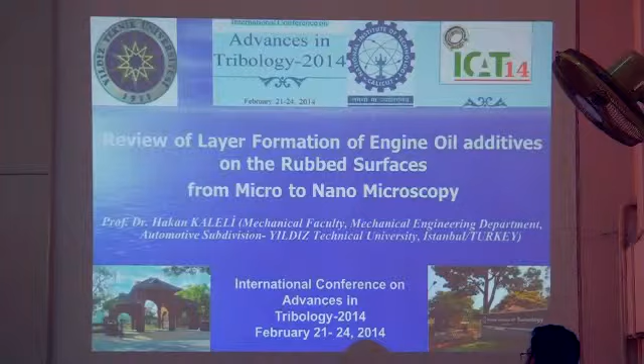Thank you. I will present about additive layers formed on the surface between sliding pairs, and I have been working on that for many years. So the title is Review of Layer Formation of Engine Oil Additives on the Rubbed Surfaces, from Micro to Nano Microscopy. It's a huge story that I will talk about.

But before I go on, I will introduce a little bit about my university. This is the main campus. We have two campuses, and I am in the main campus. We are happy because as a technical university, we are in a green yard. This is the only university that is green between trees, but it's on a hill at the top of Istanbul. Istanbul is situated on 7 hills, so this is one of them. We are lucky my university is on the hill. And this is the entrance.

It was founded in 1911, and there are 10 faculties, 2 institutes, and more than 23,000 students.

At the end of this is the Bosphorus Bridge, very famous. As you know, the Bosphorus Bridge separates the European side and the Asian side. Istanbul is divided into these 2 sides. Every day I cross this Bosphorus Bridge, and when I go to the top, on the hill, here is my office where we do lecturing.

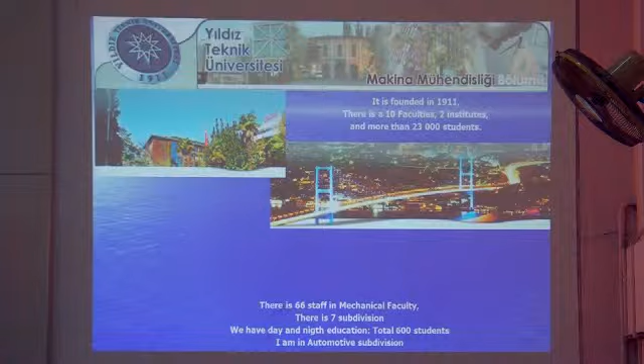I am in the Mechanical Engineering Faculty, in the mechanical engineering department. There are 66 staff in our faculty, with 7 subdivisions like automotive, heat transfer, manufacturing, etc. We have day and night education, with a total of 600 students. I am in the automotive subdivision. This is the automotive subdivision, and mostly we have engines and engine test rigs.

First of all, I would like to thank very much the coordinators for inviting me to this conference. It's an honor for me to be here as a keynote speaker. Tribology is the science and engineering of interacting surfaces in relative motion. My application is mostly on lubrication, which is part of tribology, and by lubrication I arrive at wear by friction. It's a huge story because I started this story in 1999, 15 years ago.

I worked on some test rigs with oils, but engine oils, and I obtained on the surface protective layers of additives. Yesterday, or before yesterday, we talked about prediction, and this was not prediction. I didn't predict to find protective layers on the surface, but after the test, when I found it, then I did more prediction.

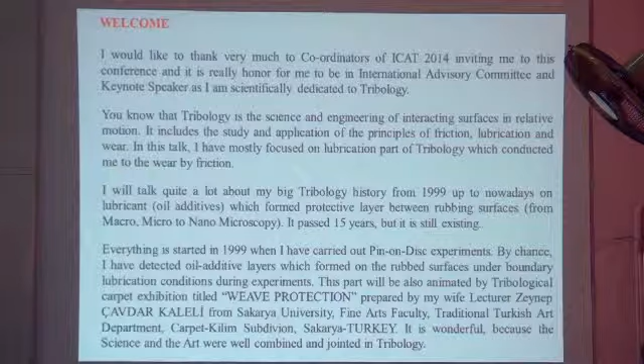This was carried out first of all on pin-on-disc experiments, which I will show you shortly. I found the formal tests on the surface, the formal testing conditions, and this can apply to every test rig.

So by chance, as I found this, you will see an exhibition - a carpet exhibition. My wife is in the art faculty at Sakarya University in Turkey, another university a bit far from Istanbul, about 1 hour and 30 minutes away. So we joined science and art - she weaved my tribology pictures, photos, onto carpets, which you can see in the exhibition.

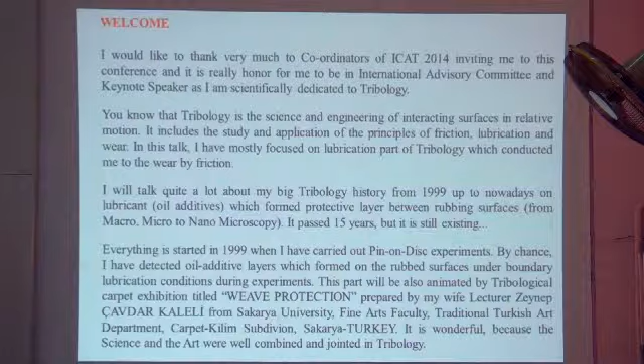This is a poster. I'm sorry because she couldn't come - my mother-in-law was sick and is in hospital, so she's very sorry not to be able to be here. Well, let's go to the work now.

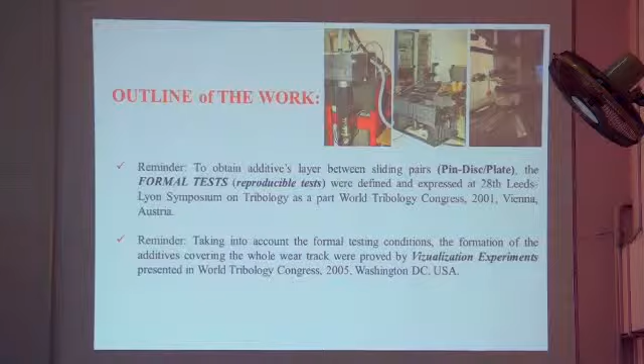Here you will see pin-on-disc, pin-on-plate, and another pin-on-plate machine. First of all, I did many tests on the pin-on-disc and pin-on-plate machines, and I found the formal testing conditions. I will talk about those in detail later, but just to explain to you the outline of the work.

Taking into account these conditions, we wanted to see, to film, to visualize the surface formation - how we obtained it. We wanted to see it, and we did it, and these results were presented at several congresses.

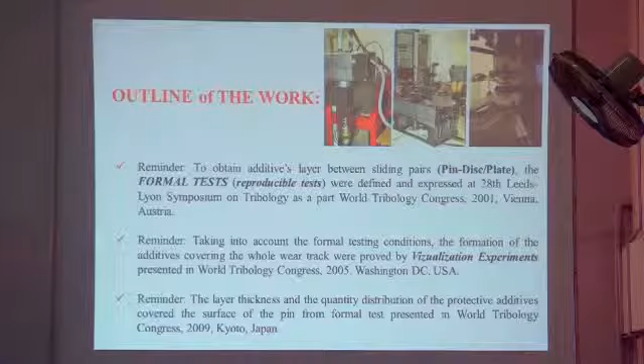As we have seen the surface, we wanted to measure the thickness, the layer thickness of additives. On pin-on-disc and pin-on-plate test rigs, we have specimens, but those specimens are mostly steel, like steel 52100 or 51115. These are regular standard materials used everywhere in the world.

But as we found the protective layer on the surface, and as I'm in the automotive division, I was very interested to see those layers, how they formed on the cylinder liner in internal combustion engines. So we did more experiments, and we detected those layers.

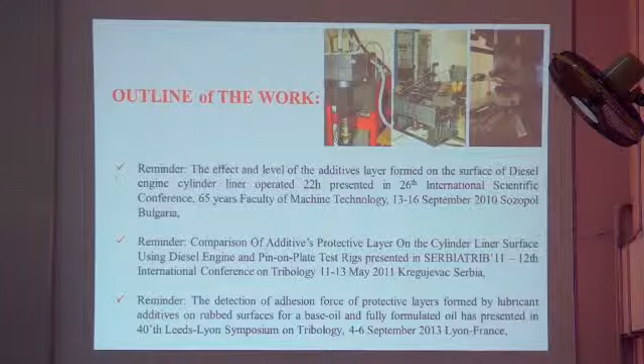We also compared the cylinder liner with plates from the test rig at another conference. Then we started to go from micro to nano, because at that time we were investigating using optical microscopy and electron microscopy. Then we went further and arrived at measuring and finding those additives using nano-tribology, nano-measurement with AFM.

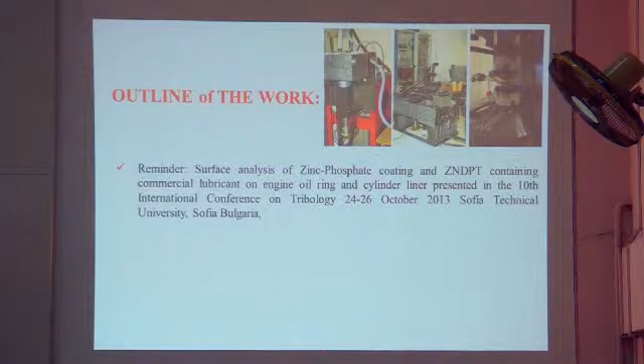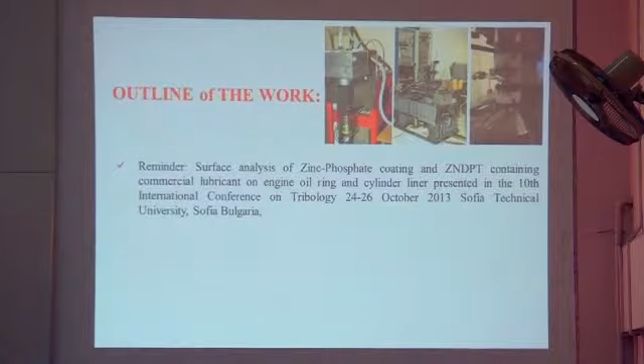When we were doing some engine tests, we detected very interesting results, which I presented yesterday. We tested different piston rings on the cylinder liner on a test rig, and it was very interesting because oil contains some additives, mostly ZDDP, calcium sulfonate, etc., like anti-wear agents, antioxidants, etc.

On the oil ring, not the compression ring, not the top ring, but the second ring, on the surface we detected zinc and phosphate. So they cover, they coat the second ring, the oil ring, with zinc phosphate. This is a very interesting subject, and we are working on it. I have a PhD student, and this work will be carried on more.

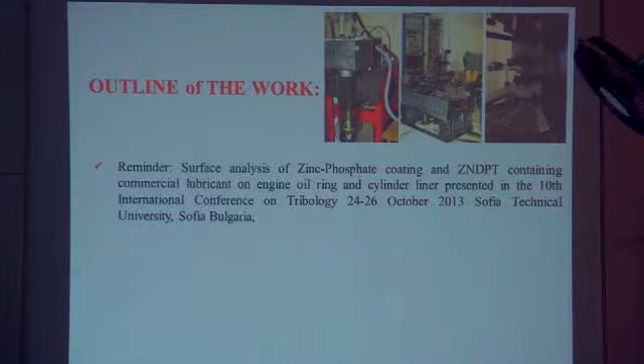As there is zinc and phosphate in the oil, the zinc and phosphate also get removed from the surface, and it contaminates the oil. This can be very dangerous because there is a composition of oil in the fully formulated lubricant - we have everything. If you add more additives to the oil, it can be dangerous. It can be positive, but mostly there is an antagonistic effect, not a synergetic effect, which degrades the lubricant. So we caught this, and we talk with some piston ring companies, and we are discussing more on that.

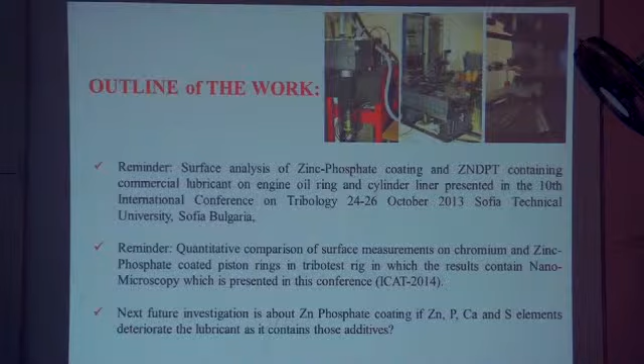This was presented yesterday, but I put some more slides to show you here. Well, the next future is to really compare zinc phosphate versus without zinc phosphate, doing more tests on pin-on, on reciprocating pin-on-plate test rig, and also in the engine.

So we finished some experiments on pin-on-plate, and we are now carrying out, setting up the engine test. So we will see the surface of the liner and also piston rings, but using the right piston rings also.

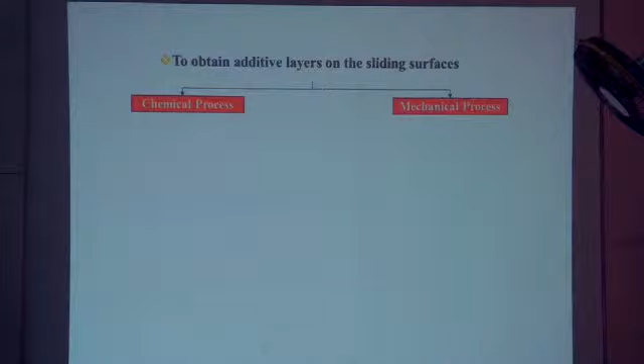Well, to obtain additive layers on the sliding surface, what do we need? This is general information - just to remind you, there are two processes, one chemical and the other mechanical. As we are mechanical engineers, I am mostly interested in the mechanical part, so the rest - sorry to the chemists - but they do more tests on EDS, reactions, etc. In the mechanical part, you can see.

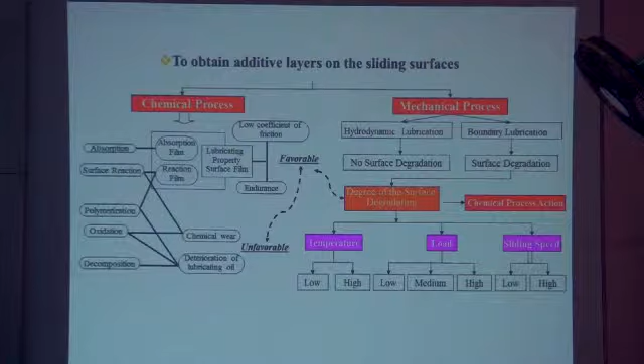So what I would like to explain here is, in the type of lubrication, if it is hydrodynamic, meaning oil separates the two surfaces, on the surface we don't obtain the protective layer we wanted. What we want is that all the additives form on the surface, covering it, like painting a wall with a brush.

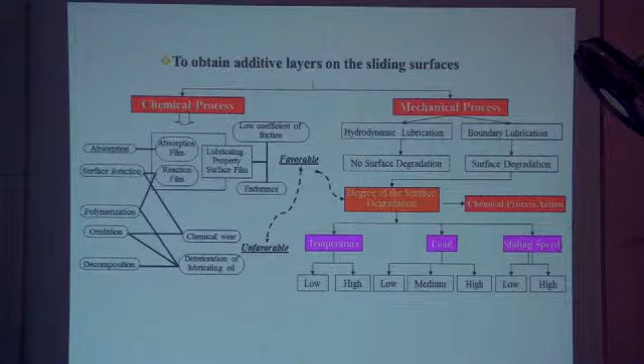Because in hydrodynamic lubrication, if the two bodies don't touch, there is no surface degradation. The surface must be degraded, but the degree of surface degradation is very high if it is dry friction - the surface is much more degraded, and additives do not form on the surface. This degradation is important, but it must be slightly degraded to make the surface attractive, a bit of flatness, suitable, where this favors chemical reactions.

So all the chemical reactions occur, and you have a layer on the surface. Of course, temperature, load, and sliding speed, which are mechanical conditions, affect the formation of those layers.

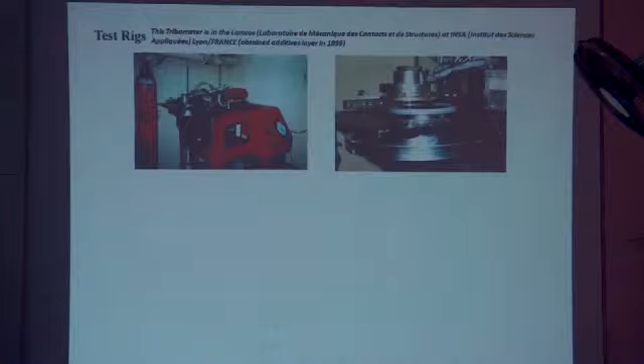Well, many years ago, 15 years ago, I was invited to France, to Lyon, and there is a big tribology lab there. I wanted to do tests, as I did in my PhD thesis, lubricant tests on a pin-on-disc machine. And very interesting, you know, this configuration.

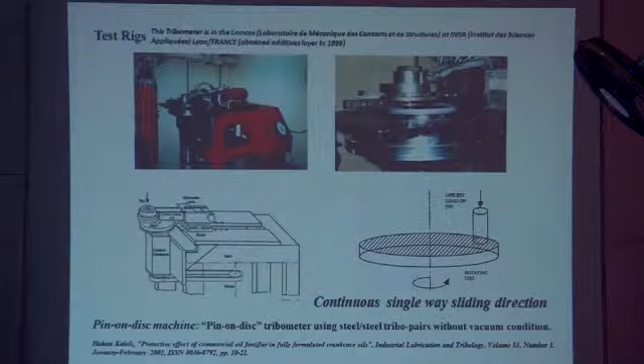I would like to take your attention, because it's very important. If you do the same test on pin-on-plate machine, you don't get additive layers. But we did some more tests with lubricant, with additives - that time, oil fortifier was very famous. Just to see the friction behavior and surface analysis. On pin-on-disk machine, when the disk turns around, it's always continuous, it doesn't stop. But in engine, it stops at top dead center and bottom dead center for a short time, and this affects the layers on the surface.

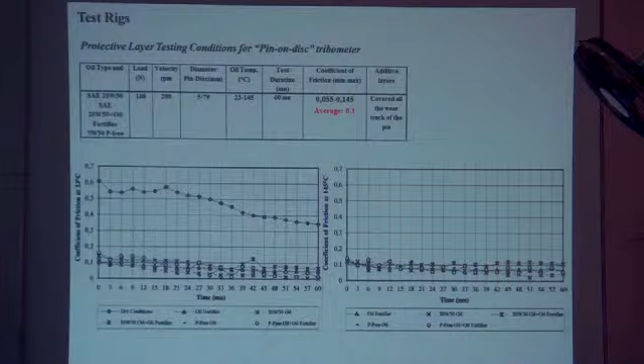That's very interesting. That time, the boundary lubrication as a friction coefficient was 0.1 as an average. So we did friction tests with different kinds of oil. What we obtained here - this is the pin surface, this is disk surface - there is no oil here, because it's a dry test, and first I wanted to see what happens on the dry test. I was curious about it. It's all worn out, scuffed. You see the surface is not very interesting.

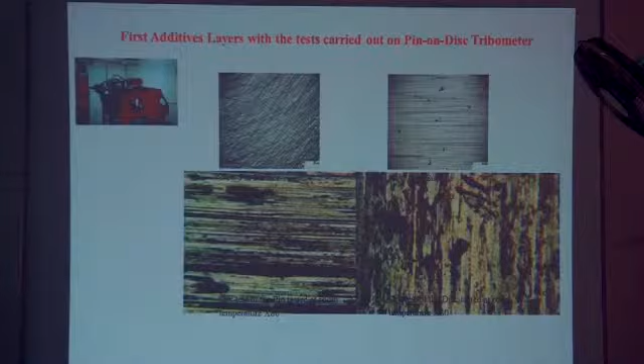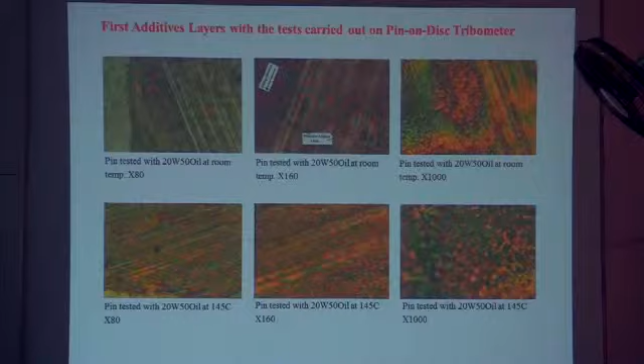So we did tests with oils, engine oil, and additives. I didn't predict this, but what we found really on the surface - the pin surface mostly - it was covered by very colorful things. When we investigated those colorful additives under the light microscope, optical microscope, they are colorful. So like Einstein, I said, oh yeah, we found this one. It was very interesting - you see the protective additive layers on the surface. I will show you many examples of this.

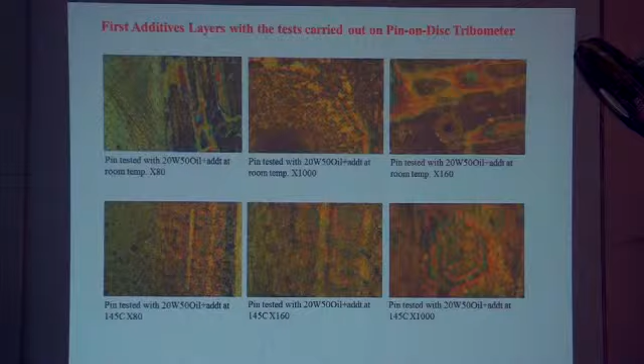That time, scanning electron microscopy was using only Polaroid photography. You cannot measure it electronically like nowadays. Also optical microscopy, that time it was very difficult - there was no digital camera, we first used a black and white camera, then we bought a very special color camera and got these pictures. So we developed these pictures, and I still keep the negative slides.

You see here that the pin surface - there is no rubbing here, but the rub surface here and the worn surface here are slightly degraded. If you investigate that surface, you will see that additives are coming out, shown by SEM and X-ray analysis. These are examples. I published this in the Industrial Lubrication and Tribology journal at that time.

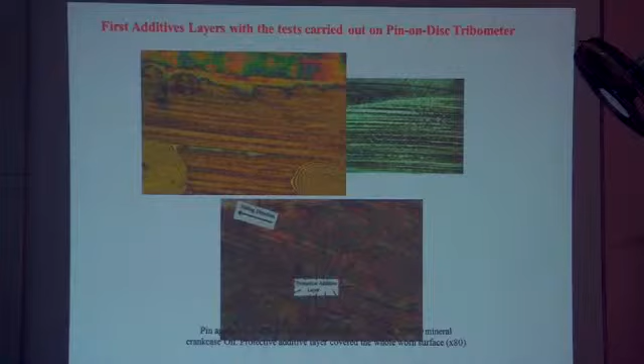What I would like to inform you here - this is the disk surface, because the pin material is different than the disk material. The pin material is a steel. The disk material is also steel, but has much more chromium on the surface, in the composition. So that time and even other times, the layers mostly formed only on the surface of the pin, but not on the plate.

Maybe I'll show you here - like here, you see this is the disk surface, and in a very small part, I could investigate where it forms layers like islands on the surface. There is some, but not too much.

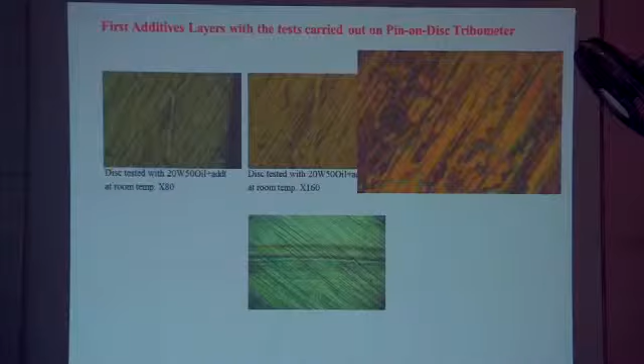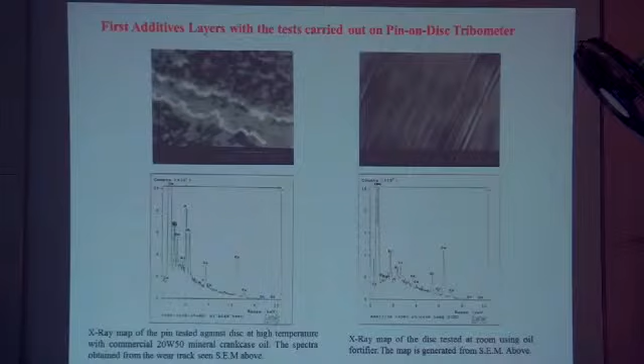Then we did some SEM photos. When I investigated on SEM, I found those additives formed on the surface, mostly because the oil contains calcium, phosphorus, sulfur and zinc. And when you go deeply to a higher magnification on SEM, it's like you are flying between clouds in the air.

You see, it's like clouds, very interesting. In the part of the disk surface, those clouds are much less visible - that part is not well viewed. You see the liner finishing parts, and it's like clouds here. These are additives.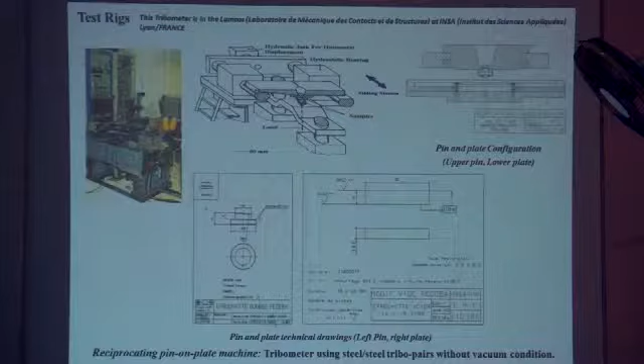In the next step, we wanted to do those tests on a pin-on-plate machine. France has got a very nice pin-on-plate machine, so you can do a lot of tests. We did tests on pin-on-disk machine, and pin-on-plate machine - sorry - this is the pin and plate surface. As the movement was continuous on the pin-on-disk, we couldn't be as successful. We did the same conditions on pin-on-plate, even with pin and plate. We obtained some additive layers, but it was like islands.

So I always say, you paint the wall, and the wall is not painted - just if your brush has less paint, you don't paint very well. But if you have more paint, thicker color, then your wall is all painted. In the case of pin-on-plate, it is not well painted - the additive layers formed like islands.

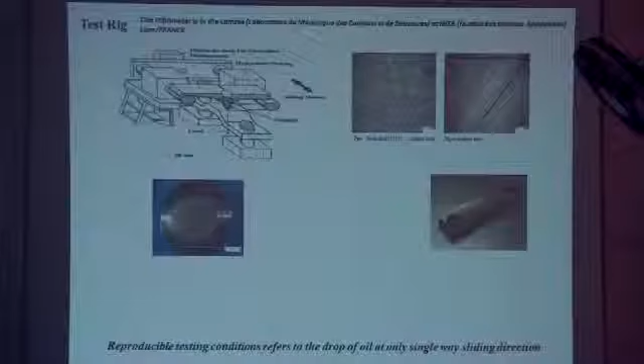So with that machine, we found the continuous way, because it's charged - loaded, unloaded, loaded, unloaded. Every time when it was loaded, it was on a single way. We did many tests - step loading, dropping the oil, etc. Only 3 drops of oil here: 1, 2, 3. Then you make a line, and under those conditions, we arrived at almost 0.11. We obtained a layer that fully covered the pin surface.

Well, this is the example of the pin. You see, this is the optical microscopy, and in higher magnification, it's very colorful here. If you make SEM, you see that the calcium, phosphorus, and sulfur exist everywhere. It's very nice, it's well done.

My wall is painted here. So this is the formal conditions, and we did the other tests taking into account these conditions. I compared the pin disk and pin plate results, just to compare them.

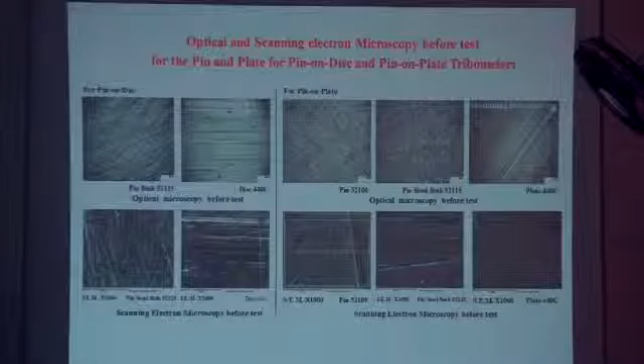This is before, for the pin and disk, of optical microscopy and SEM. This is the pin of the pin-on-plate and SEM. There is a material effect also on the surface because...

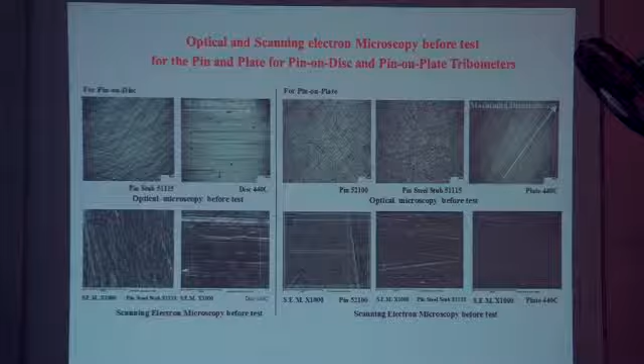And on 115, we obtained more layer on the surface, because the surface degradation is very appropriate to adapt the surface to get a slightly nice, flat surface, where the additives chemically react on the surface. And when you wash the surface, because it's not like that... okay, I found it, no, it's not like this.

Before test, you wash the surface. The surface is much more clean, nothing on it, it's dry, you do the test. Then you take it off, wash ultrasonically. That time we washed with hexane, but now they've forbidden hexane - it must be washed by heptane, or even hexane or heptane. When you wash the surface, the oil is gone, nothing on the surface.

But additives, the layers remain on the surface - they don't go away. So the slide I show you, and I will show you more slides, every test is after washing the surface and drying it, then examined optically and electronically.

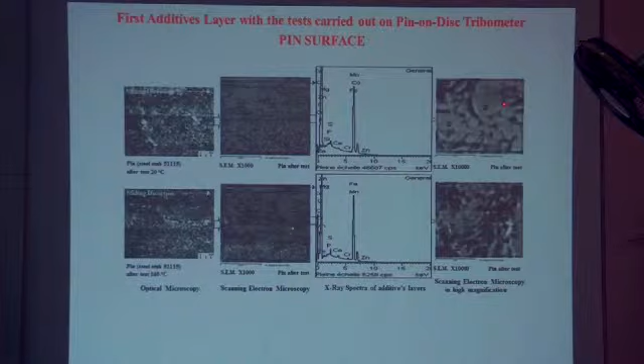Well, this is the pin surface of pin on disc. On that surface, with pin before and after, we found additive layers on the surface. And you see the SEM is like close - just keep in mind, we came up to 10,000 magnification.

It was very difficult because when you increase the magnification, after some point, after 5,000, it's getting difficult to focus on the real surface. We could focus it with a different way. So you see these are the additive layers on the surface, and when you look, calcium, sulfur, and phosphorus exist on the surface that formed this layer.

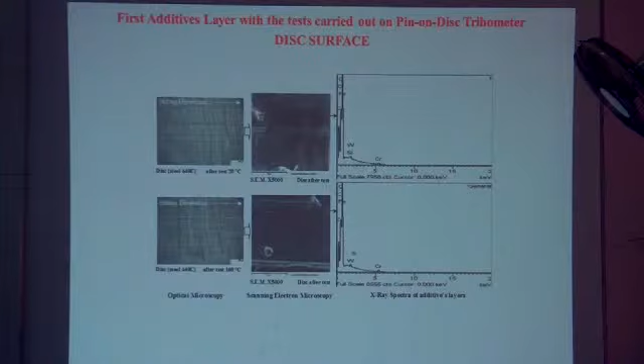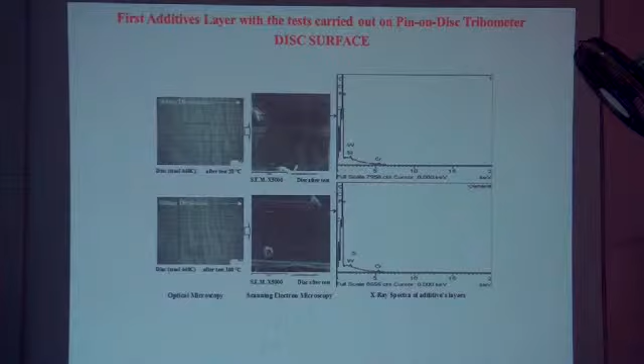On this surface, as I told you, it's another material because this is 51,115, and the disk is 440C, where the material has much more chromium. I have another slide where I know the composition, so if you are interested, I can show it.

The answer is this: not only chemical mechanism, but also mechanical mechanism is the main factor which plays an important role in the activation of additives to form additive layers on the surface.

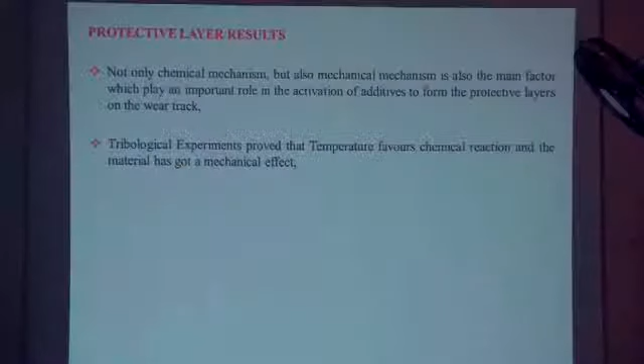Tribological experiments prove that temperature is very important. When you increase the temperature, the reaction gets faster, and the additives form better on the surface. So temperature is a chemical factor, and the material is eventually a mechanical factor affecting the formation of additive layers.

Formal tests concluded that surface degradation is a mechanical action - the surface must be degraded slightly to form additive layers. I don't put this in the slide because it takes a long time, so I must talk up to evening.

Just what I mentioned, we did some small dry tests, short dry tests of 1-2 minutes, on the same conditions, then we put the oil and continued the test. As in the dry test, the surface is well degraded, then in the next step we carried out the test for 42 minutes, and the additive layers formed on the surface were much higher than the regular test. So that proves surface degradation is very important.

Well, what is the main mechanical mechanism? It is surface degradation, as I told you, which favors and contributes to chemical reaction on the surface. The degree of surface degradation is very effective.

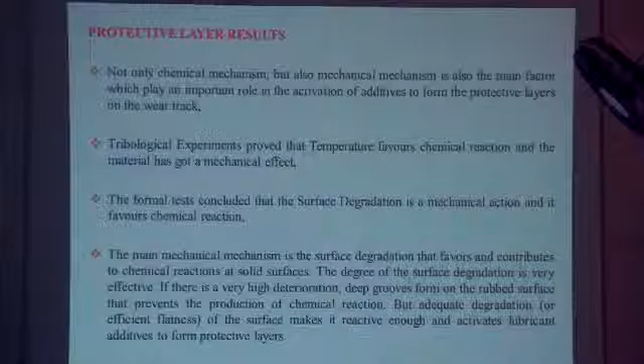But if you have adequate degradation, efficient flatness of the surface, it makes it reactive enough and activates lubricant additives to form a protective layer on the surface. This is the main mechanism.

After this, they asked us, is it true what you do? So I showed them the photos. They said, no, we don't believe it. You must take the film, prove it by the film.

So what did we do? Instead of a regular pin, we used a sapphire pin, and behind it a high-speed camera, with a plate of the pin material, and we filmed it. We filmed the formation and proved it. That was very interesting, so I'll show you.

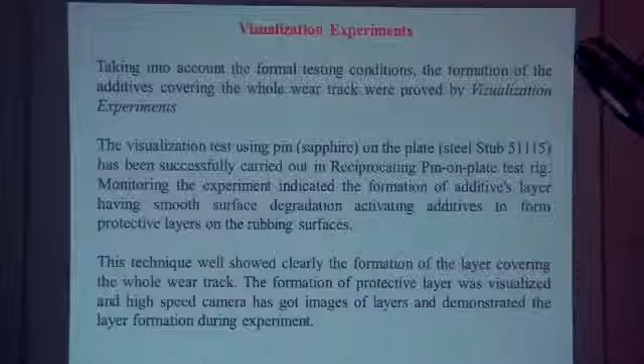This is the sapphire pin on the plate, and the steel strip. We ran the experiments where we found additive layers, because under the same conditions with a smooth surface flatness, we obtained additive layers on the surface.

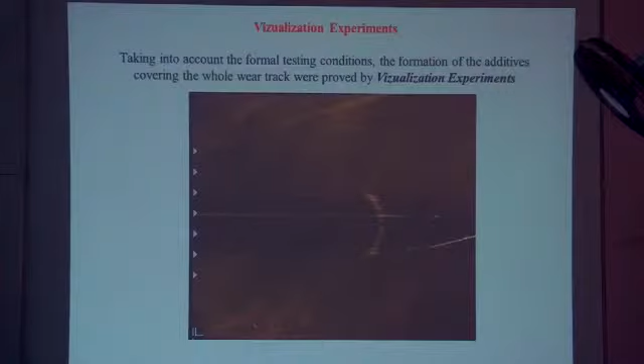I hope it will work. You see the beginning, after this, now loading, unloaded, loaded, unloaded. If you can see, you will see white patches, white points forming on the surface.

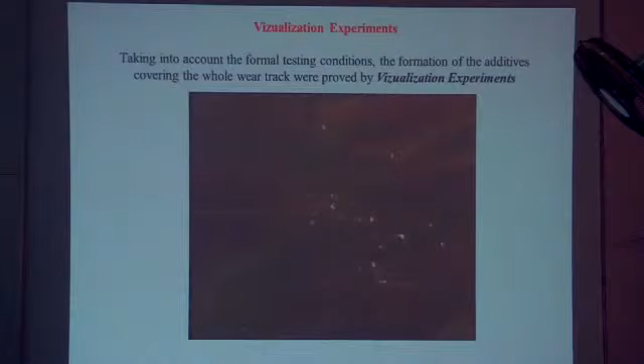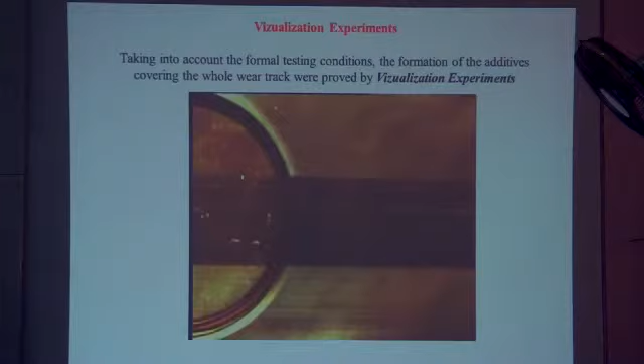The white patches are becoming more visible. So at the end of the test, these patches are formed as additive layers on the surface. You see these patches getting more, increasing on the surface. That's very interesting. You see, much more visible. You see, covered like this.

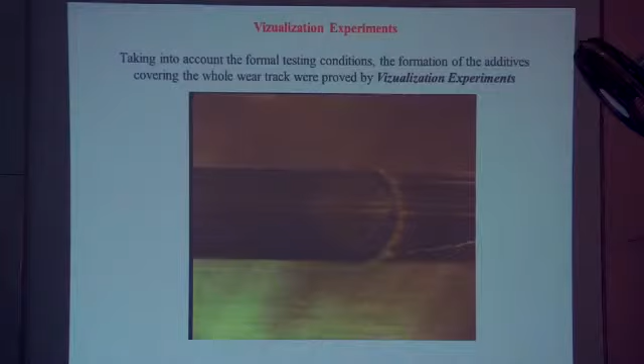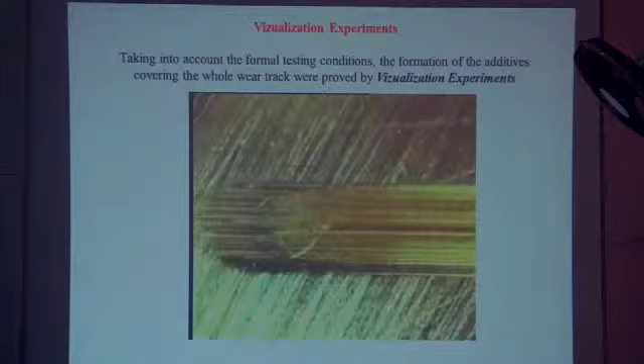Here is where they start to form. Then we changed the lighting setting to see the colorful layer better, towards the end of the test. You see, they are much more visible, that's very interesting, incredible. We changed the light so you can see all the surfaces very well. This is towards the end of the test, the last seconds.

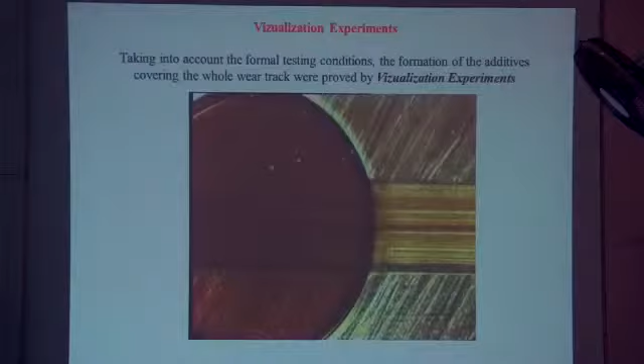I presented this, I think, as I remember, maybe in Washington D.C., or I'm not sure, at the World Tribology Conference. The Japanese came and asked, how did you find it? How did you do it? So I tried to explain, but it was difficult.

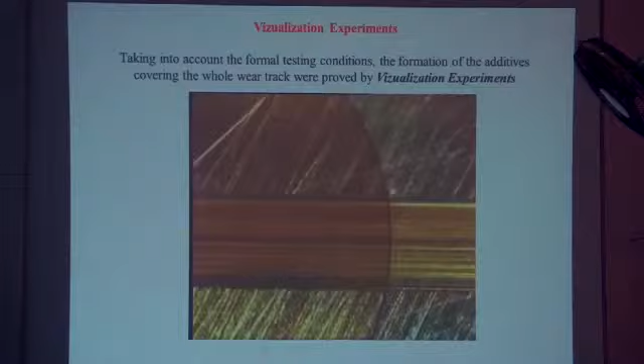Now it's all covered, you see, it's darker, more visible. You see on the pin, you have seen the layer, and you have seen the formation of the layer. The pin I showed you. We then carried out different tests with material.

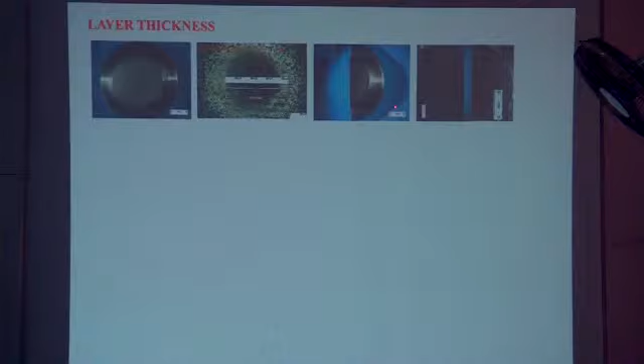Material 51,150, and we tried to measure the layer thickness. So you see the pin, this is the pin surface, and we could cut it in two parts and look at that direction. At different magnifications, we could detect the thickness by AFM. It was very difficult, but maybe I was lucky, and it was very interesting.

I'll show you only the 4,000 magnification, because we also did 500 and 1,000, but that would take a long time. Here is the non-wear area, and I put here the AFM and X-ray. We did cartography for calcium, phosphorus, and zinc. It's very colorful and really protects the surface. Is it true? Yes, because on the X-ray you see calcium, phosphorus, and sulfur detected on this part, but here there is nothing.

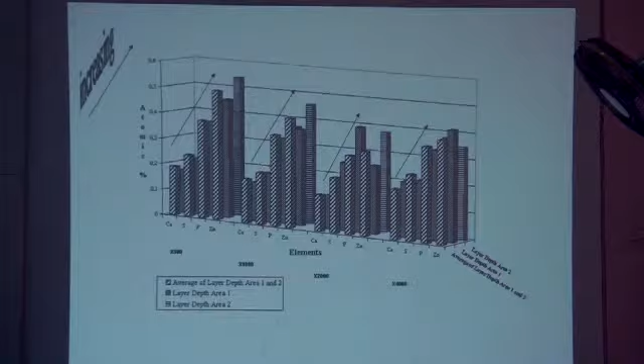And we did some statistical results, from 500 to 4,000 magnification. We found the results, and we repeated those tests three or four times to be sure. So the calcium was minimum, then after that sulfur, phosphorus, and zinc. Zinc was very high, I think because it acts as an anti-wear agent in the lubricant, protecting against wear.

So we did some more statistics, and we measured the layer thickness at different magnifications, arriving at thicknesses varying between 0.75 and 11 micrometers.

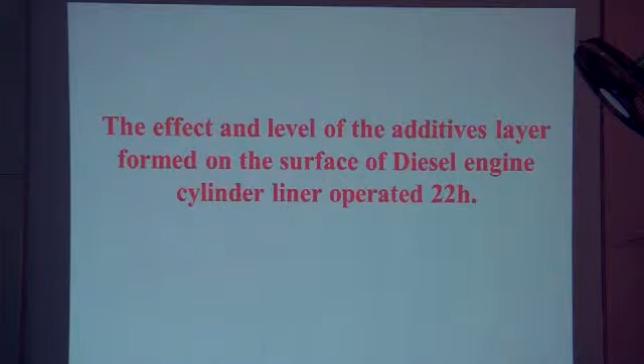Well, you see these are layers formed on a tribotest rig. But as we are mechanical engineers and I'm in the automotive division, I wanted to see those layers in an actual engine. So we carried out a diesel engine test for 22 hours. This is the engine, we did this one with one of the master's science students.

And we carried out the engine test, and you see the cylinder liner, which we cut. After the test and before the test, the Total company supported us, so we did oil analysis and engine performance tests. We found under what conditions we must carry out the test, the operating condition. Then after, we examined the surface.

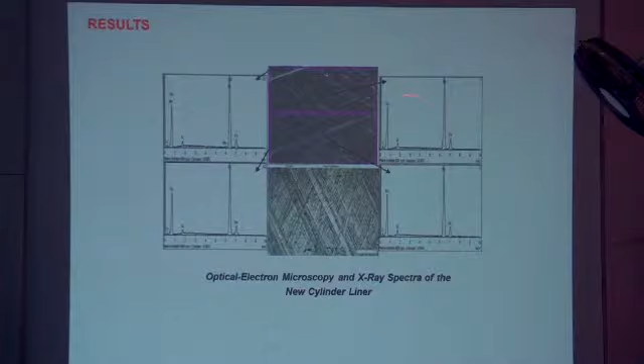As a result, you see this is the cylinder liner, this is a new one with the honing part, and this is SEM. So you see the material, on the surface there are no additive layers. There are no additives, so it's normal.

Yes, this is the top dead center. Well, in my other presentation, we have all results. So I show you short results, mostly top dead center and middle center. Then we compare it also with the plate examination.

The plate is cut off from the engine. It is the same plate, cut off and set up to the test rig. And we tested it with the same oil.

Very interesting. You see this is the top center, just below the 800 micron to the top dead center. And top dead center is not in line. When you look at the surface, it's like islands. You see here is where the combustion chamber starts. The combustion chamber is much more black.

Even I have some more work on the combustion chamber too. I examined also the combustion chamber, and if you examine it, it's horrible. It's full of additives - all carbonous residues, but also you find zinc, phosphate, calcium, all kinds of additives on the combustion chamber because of the combustion burn also.

Yeah, you see this is the top dead center. Here it's colorful, but if you look at - well, this is an X-ray of SEM, and you see the zinc, calcium, sulfur, and phosphorus.

Well, I compared this with the engine and pin-plate test rig. If you compare this one, you will see this is a new cylinder liner, and we use the plate, the same plate, even the same plate sometimes cut from the engine. If we couldn't cut it, we honed it under the same conditions - we measured the honing, we did honing measurements of the liner, and we honed again the plate.

But in my last tests, I did other tests I don't show here. We have been successful in cutting plate pieces from the engine. It was difficult, but we did it, and we did many tests.

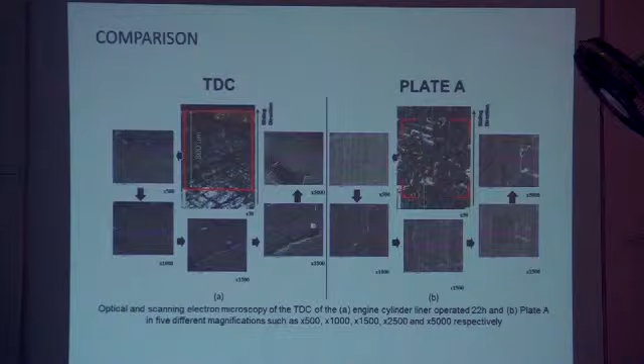Yeah, this is the top center, here 800 micrometers, and this is the plate. So you see it's very similar - we found very similar conditions and very similar layers on the surface. It's covered.

Yeah, this is the top dead center. What's happening here? Well, you see in some points there is only phosphorus, because these are additive layers but as islands. In some points it is not covered on all the top dead center. Yes, as in the plate, I showed the optical photo, so it's the same.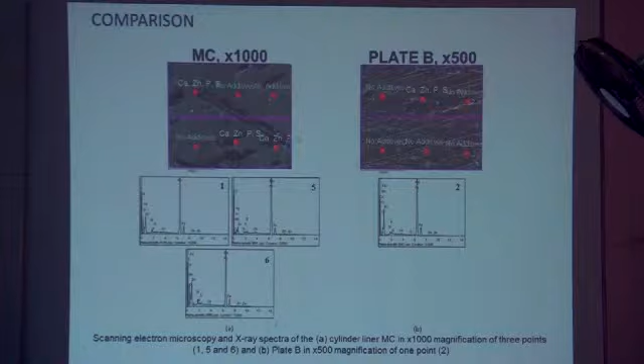You can compare the color with top dead center and the plate. You see, it's like islands - even in the plate it's like islands. And very interesting, in the honing grooves, yeah, we found those layers.

Well, it is usual, because why? You know why they hone the surface? So you know it - to maintain the oil. If there is oil starvation, these pockets help for rubbing and to protect the surface.

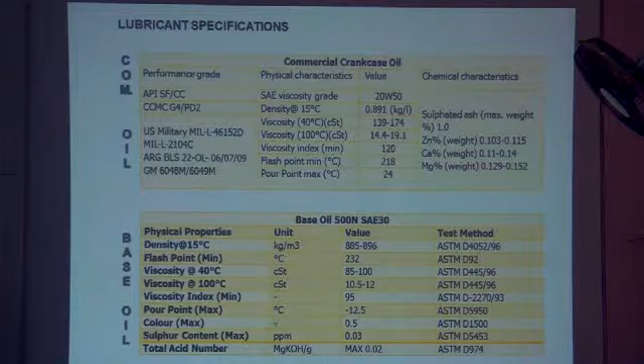Yeah, we go now from micro to nano. We carried out again several tests on the pin-plate machine with commercial oil and base oil, because to compare both surfaces we need tests carried out with base oil and what happened with commercial oil.

Well, this is the test with base oil, so you see no additives on the surface. And we carried out some tests by AFM here - this is optical microscopy, but no additives here. This is carried out with base oil.

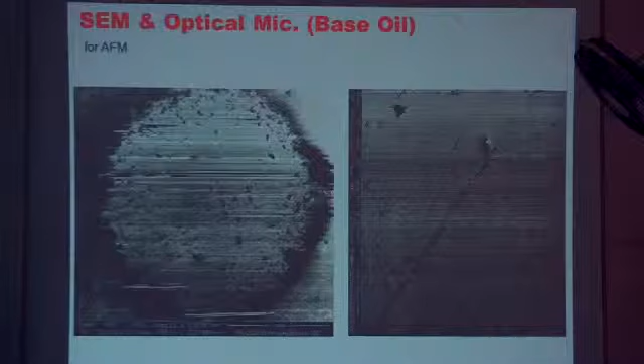And at that time, we found layers on the pin and plate because we used the same material. The material wasn't different - that time it was different, but now even the plate and the pin played a role to form a protective layer on the surface. You see this is much more darker because the surface is well degraded and well-formed layers on the surface.

Well, this is the optical and SEM microscopy, non-used and used, and we did AFM. Shortly I will show you better AFM in 3D. What we found here, the test carried out by base oil, the surface is much more rough, but there is a smooth surface with test carried out for pin and plate. That's very interesting.

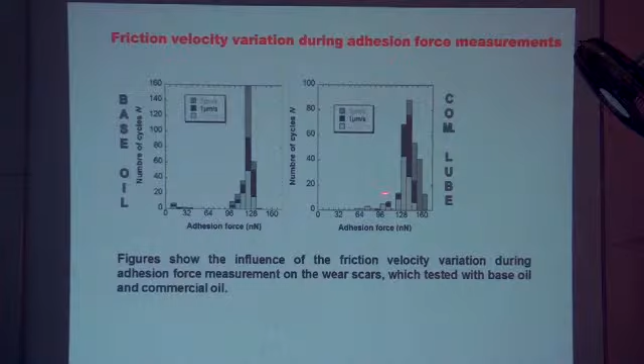And we did some force distance curves. We found more force for the test carried out with commercial oil, where there is additives. And we did adhesion measurements. The adhesion measurements showed higher forces on the surface of the pin and plate carried out by commercial oil than base oil. Even adhesion force measurement here, and also the friction velocity, etc. You see, it is much more higher than base oil.

Now we think that why it is high, because it shows more adhesion. We are searching now this because the viscoelastic effect of additives. It is difficult. They are more sticky when you do measures by AFM on the tip.

As I told you, I did some more tests, and I presented this in Sofia Technical University just last year, towards the end of the year, because we found very interesting results with the test carried out on the machine, on tribo test machine, but we detected zinc and phosphorus on the ring surface.

So you know there are two rings: one compression ring, the second ring, oil ring. The oil ring is to scrape the oil, and the oil ring is covered by zinc phosphate, but the top ring is coated by chromium.

Yeah, I did this test in France. So they provided us a pneumatic test rig. It is controlled pneumatically, and the 3 Kistler sensors can go up to 500 degrees centigrade.

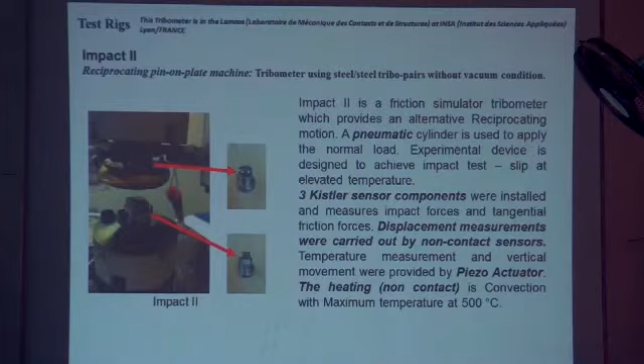Very interesting. Well, I am designing now a new tribo test. It is universal, which can be pin on disc, pin on plate, ball on disc, ring and liner, etc. Very interesting - there is an infrared lamp here. It doesn't touch, and it heats both surfaces, the pin and the liner.

Well, I hope there was noise, but...

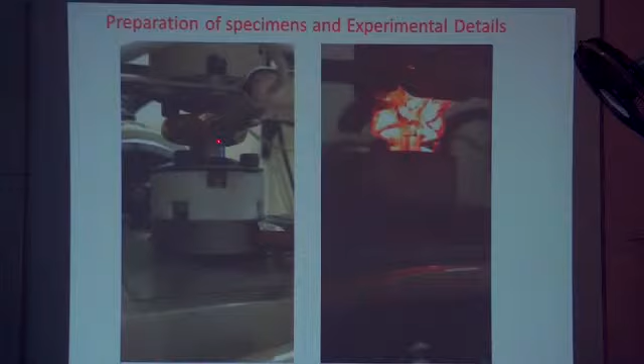So what we did in our experiments, we cut the piston rings and cylinder liner, and we installed here. You see there are holders here, and I presented yesterday this one, but I will show you in my last slides.

I will show you some results, and this one is cut. The holders we prepared in Turkey, all the holders, very strictly and precisely, we cut the piston rings and cylinder liner and put them in the holder, placed on the holders.

I did almost 1 month of tests without obtaining anything. It is very difficult because if you don't cut precisely, you cannot place the piston ring appropriately on the cylinder liner, and the piston ring diameter must be smaller than the cylinder liner, because otherwise you cannot rub both of them.

So what we did: this type of engine has got different types, so we got the piston ring of the smaller engine and the liner of the bigger engine, the same material. Then we cut it precisely, put it in the holder, and tested this.

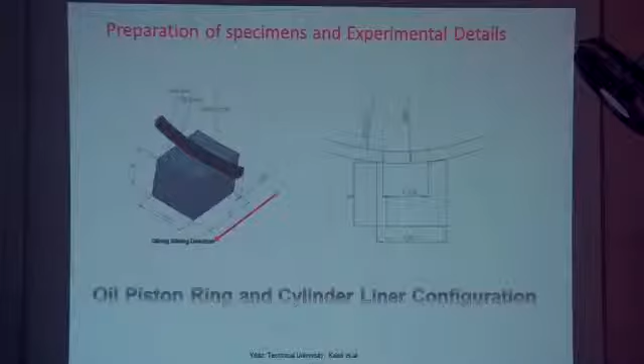Yeah, this is the configuration. And we did some surface analysis. This is a new cylinder liner. On the cylinder liner, there is nothing - no phosphorus, no zinc.

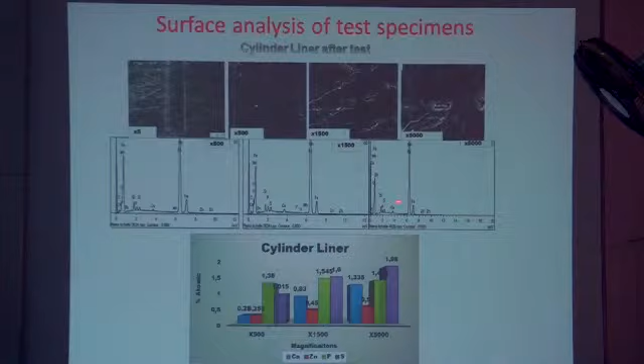This is the cylinder liner after the test, carried out with the oil ring coated by zinc phosphate. It's very interesting: on the cylinder liner, we found it full of additives on the surface. But on the oil ring also, that's very interesting - after the test, the amount of additives was also high. And then we asked the question: do those additives influence the lubricant?

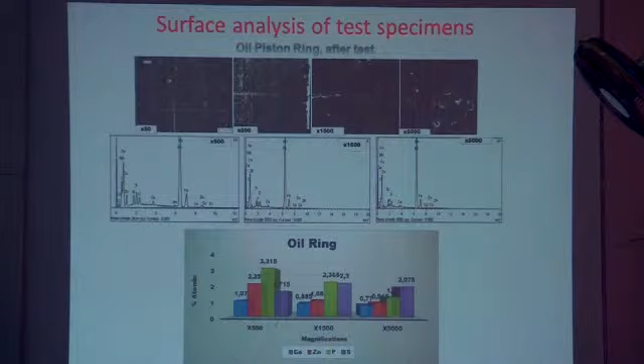Sorry, this is before the test, new piston rings, I'm sorry, and this is after a used test. Even after the test, in different magnification, we have all the additives like calcium, zinc, phosphorus. The calcium is very interesting because the coating also uses calcium. There is an amount of calcium, but this can also come from the lubricant.

Well, I presented this one, but I will show you some results because there are AFM results here.

This result was just obtained a few weeks ago, before coming here. This is the chromium coated test, carried out with the liner by chromium coated piston ring. I also have a zinc phosphate coated ring. This is optical microscopy, where you see on the liner of the chromium coated ring we have additive layers.

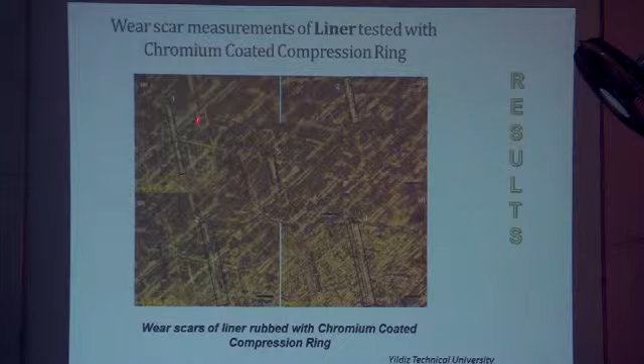5 points are measured by AFM, and you see number 1 and number 2 shown here. In number 1 you see a white patch here, and there is a white patch here also, but there are dark patches here. So these white patches are layers, are additives on the surface. We know the point here, and also we know the point by AFM.

At point 2, we catch those layers. If you remember, I showed you one AFM photo at 10,000 magnification. This is the same structure, so we are happy about that.

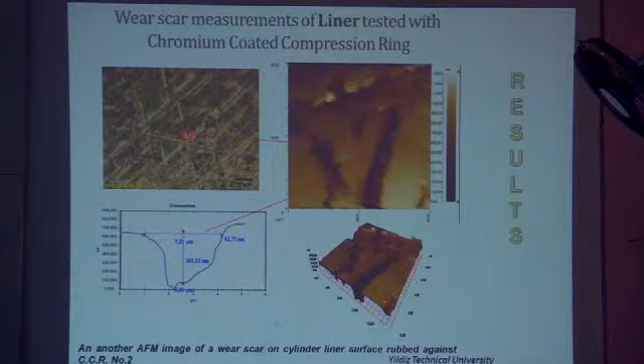Well, thank you for your attention.

Thank you, sir. Any questions, please? Sir, what is the coating procedure for zinc phosphating?

Yeah, I visited that company, and first of all, I would like to mention they didn't like what I found, because they stopped coating for heavy vehicles, for camions and trucks, because of the degradation of the oil. And why do they coat it? Well, I will tell you.

This is for shelf protection, because when the new engine comes out, it is new, and generally it is not coated by zinc phosphate. But on the shelf, to protect against corrosion, they coat it, between 3 and 5 microns. And now I am searching to coat it a different way, not zinc phosphate, and it shouldn't have any additive elements.

We carried out tests with the piston rings. We call them white rings, and we had successful results. Also, I am looking for a partner to coat the surface, for example, by some other coatings like yttrium coatings or else. Is it possible to use manganese phosphate coating instead of zinc phosphate?